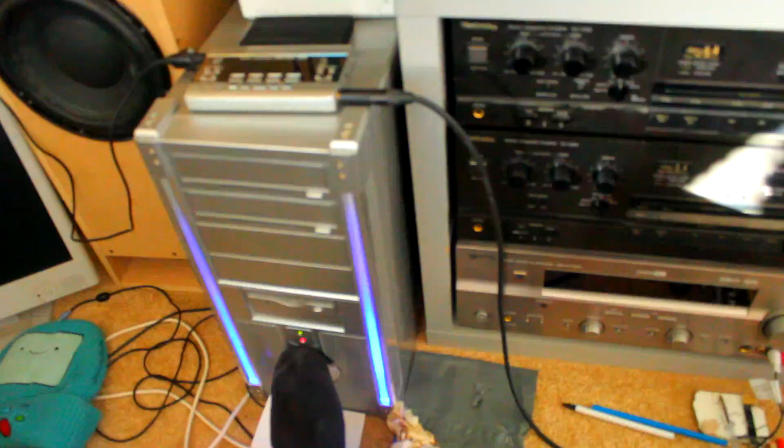Okay guys, it's looking to be a nice ass day outside, so what better day than to start on a customer's box build. Now, a lot of you people asking me how to design the boxes, what do I do, what programs do I use, just some advice and tips on building boxes basically. So I thought I'd just do a quick video and do some snapshots of this build going ahead and just give you some tips along the way to help you out when you're looking to design a box and build one.

When it comes to box design, I quite like to use BassBox 6 Pro. There's plenty of other software out there which may be better. You've got Hornresp as one, which is very good, but a little more complex, and just for a simple ported box design, so I can get a rough idea of how it's going to sound and what sort of port I need, I quite like to use this program. So I'm just going to go ahead and start a new design, and I'll start with the driver.

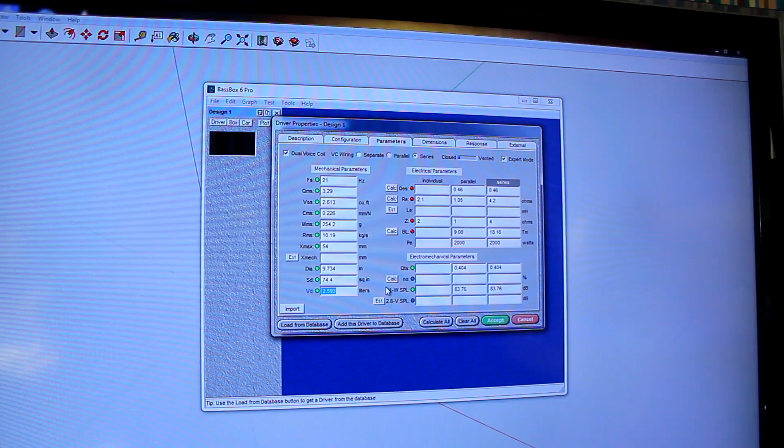This customer will be using a RE Audio XXX V4, which is the latest version. Fortunately, the database has this sub already stored, and as you can see, I load up all the parameters. Now these are the TS parameters. I'm going to choose series coils, which is what he's going to be running it at. Now as you can see, not all of them are filled in, and BB6 can actually calculate some of the rest of them. Now as I'm calculating them, you can see that it doesn't actually like how some of the parameters are tallying up. It could be because they were measured slightly incorrectly at RE HQ, or they're just not what it's expecting. It's not a problem. I'm going to go with what RE says for these parameters here.

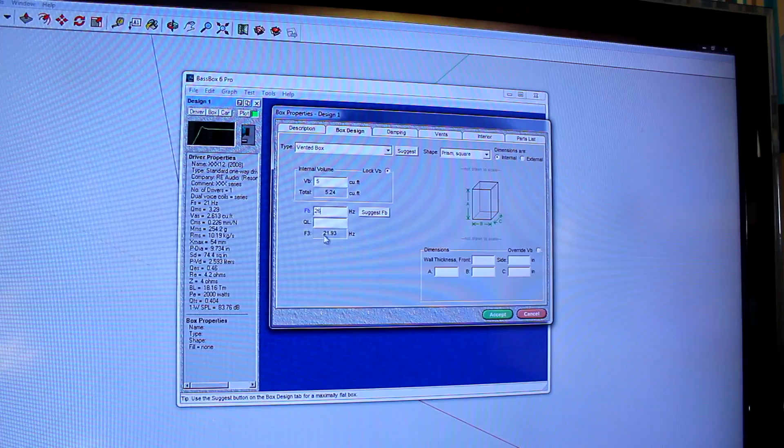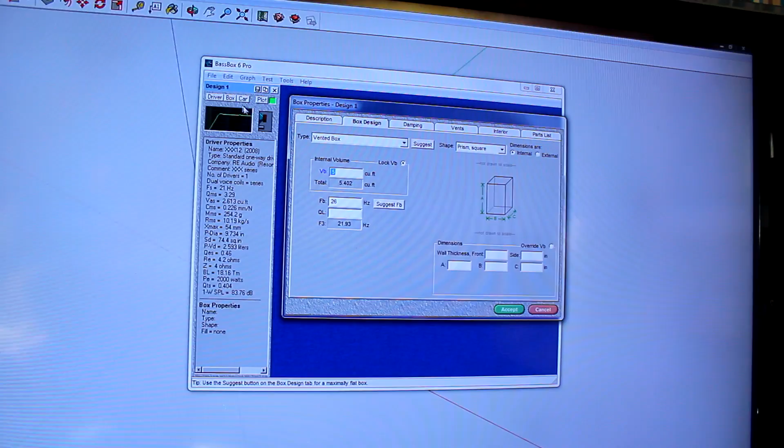Now when I did this earlier, I remembered my ports. I'm going to go for one round port, an Aeroport, 5 inches, which brings me at about 13 inches long with 2 flared ends. Let's have a look back down at my parameters here. Yeah, looking good. No dampening. The bracing I've taken into account for in the cubic foot here. So I'm going to go ahead and hit plot and see how that comes out looking.

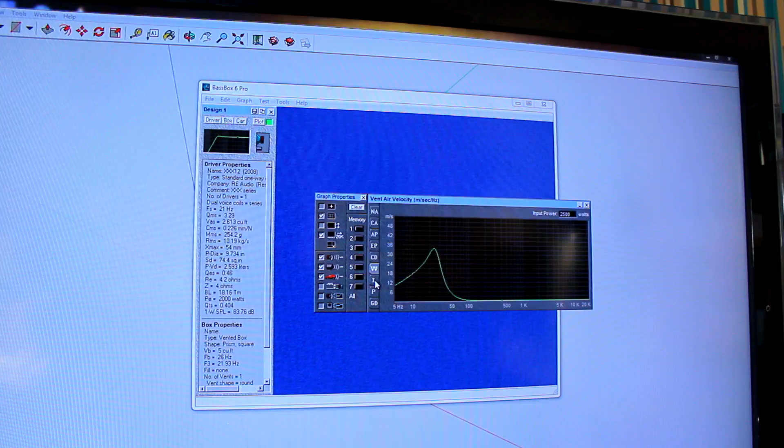So once I've worked out the cubic foot and the tuning and the port size and whatnot for the box in BB6, I always draw it up in Google SketchUp. The reason I do this is because you can kind of build the box first and see how it's going to come out, any mistakes you've made. You can kind of work out where you're going to put your bracing. You can do it right in front of you before you even start building it, which I think is wicked.

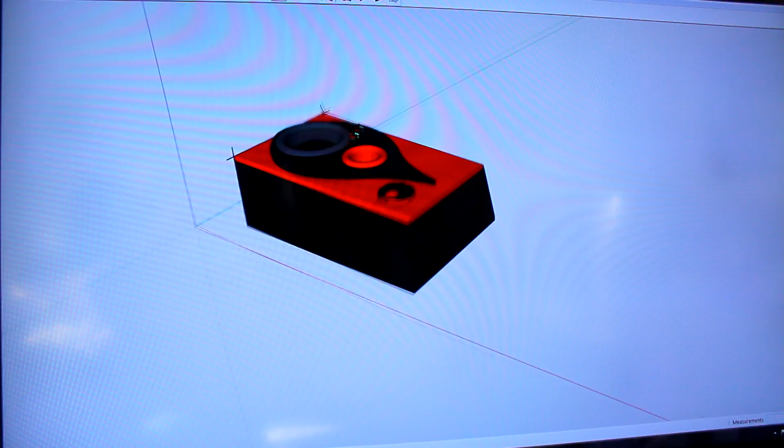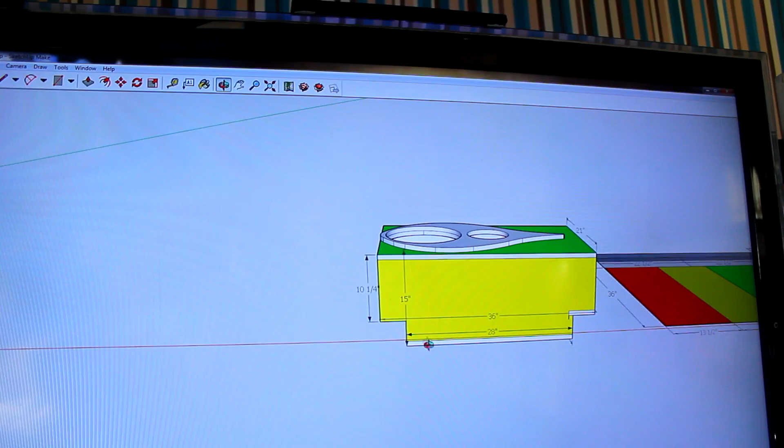So I'm going to go ahead and open this up. This is the initial plan that I had for the box, much more simpler shape and those colour designs. Decided to change that up. The shape is slightly different. His car has this kind of weird shape in the boot where it's going to slot in. It's a BMW. And we needed a bit of extra depth because this RE sub is about 13 inches deep. It's really long inside, goes down inside the box really far. So we need a bit of extra depth there.

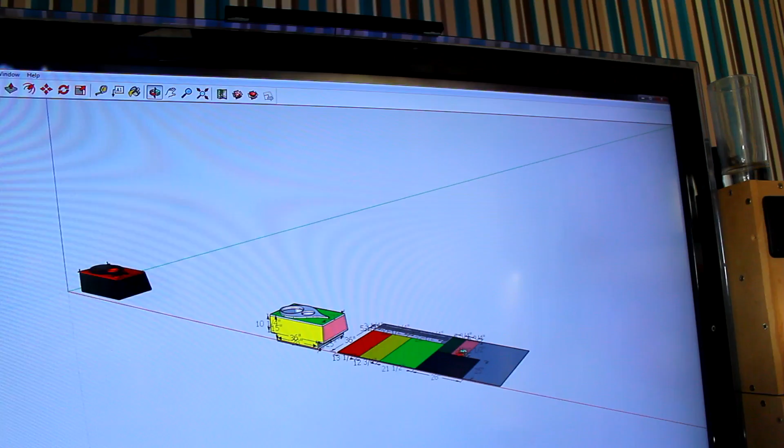So what I do is I build it up in SketchUp, as you can see here. I make sure that I've got exactly the wood, exactly how I'm going to be putting it together, with the bits overlapping and stuff, and inside as well. And then what I can do is I can just measure each of these pieces and draw it out on a big piece of MDF, the size that you get from the shops, and see exactly the best way to cut it in the store so that you minimize your losses and you get the most offcuts to use later.

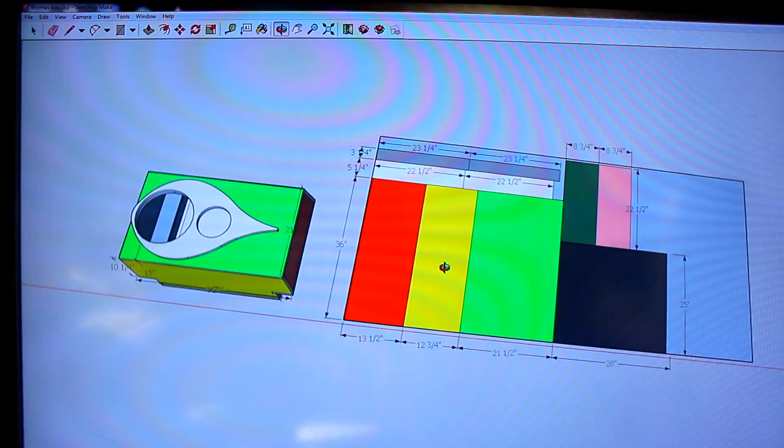So this is how it's going to all come out on the section of wood. I'll fit it all onto one big sheet of MDF, which is nice. Obviously I've got some angles to do, so I'll do those at home, but it's best, if possible, to get as many of the sides and as many of the straight edges cut at the hardware store as possible, because they're always dead straight and very accurate.

So it saves you having air gaps in between your joins and stuff. It's a very, very straight cut. And then the angled bits, I'll be doing at home. I'm trying to get as accurately as possible and as tight as possible with no air gaps. Okay, pretty much everything's set up, so let's go get the wood now. Okay, so we'll be at the hardware store.

Oh, that lady nearly stacked it over. Oh, look at that, look at that. Old school there. Now my car got rear-ended by a motorcycle the other week, so I'm having to drive around this piece of shit courtesy car, and no one gives a crap about a courtesy car because it ain't yours. Now I could do one of those at home, always using top of the range equipment. Anytime today would be good.

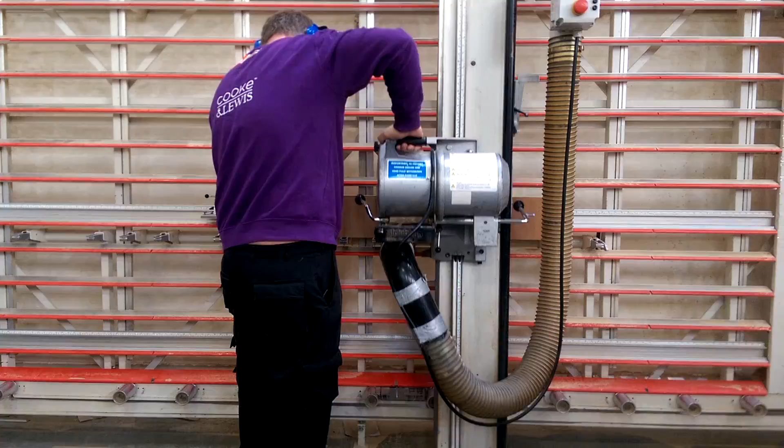Okay, shitty little car's loaded up. Let's take it to the crib. Okay, so I got all the wood home. Now, as you can see, I've got a shitload of offcuts with this one. So I want to go ahead and label up each of the bits of wood as to what they are. Makes it a lot easier when you're piecing it together.

As you can see, by drawing it out on SketchUp on the piece of wood, I've minimised my offcuts to these tiny slithers, no big bits of offcut that are the wrong shape. The only other offcut I've got is this huge long piece down here that will be good for cutting a top shape with or anything else. So I've got a nice big bit there and some slither offcuts, and that's the advantage of doing it on SketchUp.

First thing I'll do is draw out where all the bits of wood are going to be glued and stuck together, so I can drill some pilot holes in here. Now this is really handy for these offcuts, because that is the thickness of the wood that I'm using, and I can just use it to draw out where all the wood's going to be on each different piece, drill the pilot holes, and then they're ready to go together.

And when you're working out where your screws are going to go, take into consideration where other screws will be. So there can be some screws coming up from here, there's going to be some screws going in the side from here on this piece. So I don't want to be putting a screw here, because then the two screws will crash into each other. So on the edges I always leave some gap on the edge. So I'll start a screw there, and I'll start another screw about here, so that there's a bit of space for different screws going different ways so they don't hit each other.

You don't need to go overboard on the amount of screws you use either. I see a lot of people putting hundreds of screws way close to each other all along. The glue that you use actually creates a stronger bond than the particles in the wood itself, so all you need the screws for is just to hold the wood together nice and tight whilst it sets. So you don't need hundreds of them, just enough evenly spaced out so that there's no gaps, and if you've got straight cuts there won't be any gaps anyway.

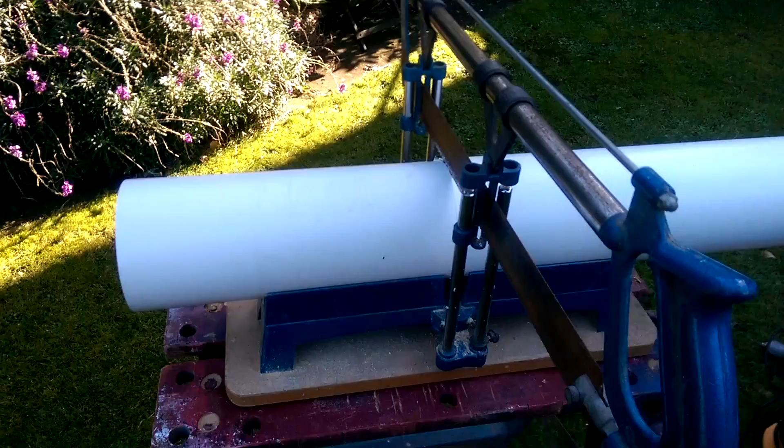So this is the tool that I'm using to cut the port section off there. It's about 12.5 inches of PVC, and the flare has to go on top still and make it a tiny bit longer, and that tunes it to around about 28-29 hertz for the box. As you can see, I've got a saw here, keeps it nice and straight, nice and easy to do.

Okay, so top is on, the first layer. The back is all smoothed so that it all lines up properly. It's looking very nice. That was a bit of a bitch to do, but no worries. Now I've just got to design the top piece.

Going to do a nice shape on there so it's double baffle. Got that drawn out on here. I'm going to draw a nice design on here. I'll probably draw the design in half, cut out half of it, and then router the other half so that it's identical. And then that will go on top, and it should look very nice.

Okay, so I cut out the top shape, that's not on there. I deliberately haven't cut these circles exact yet, because what I'm going to do is I'm going to router them. So I'm going to screw this down temporarily, get the router and go around it on the bottom circle so that the circles are identical. You can't really do that separately with a jigsaw.

So that's going to be routed exact, and then what I'm going to actually do is this whole box is going to be carpeted in a light grey carpet. That will look really good.

Okay, so the circles have been routed so that they're identical on both pieces. I've screwed temporarily down that, and I've drilled all the pilot holes for this ready to go into the second top piece. Now I just need to remove this and run the router around the box to smooth over all the edges. I might have to take a few screws out as they're quite close to the edge. Sometimes you get a lot of sparks and it's pretty cool.